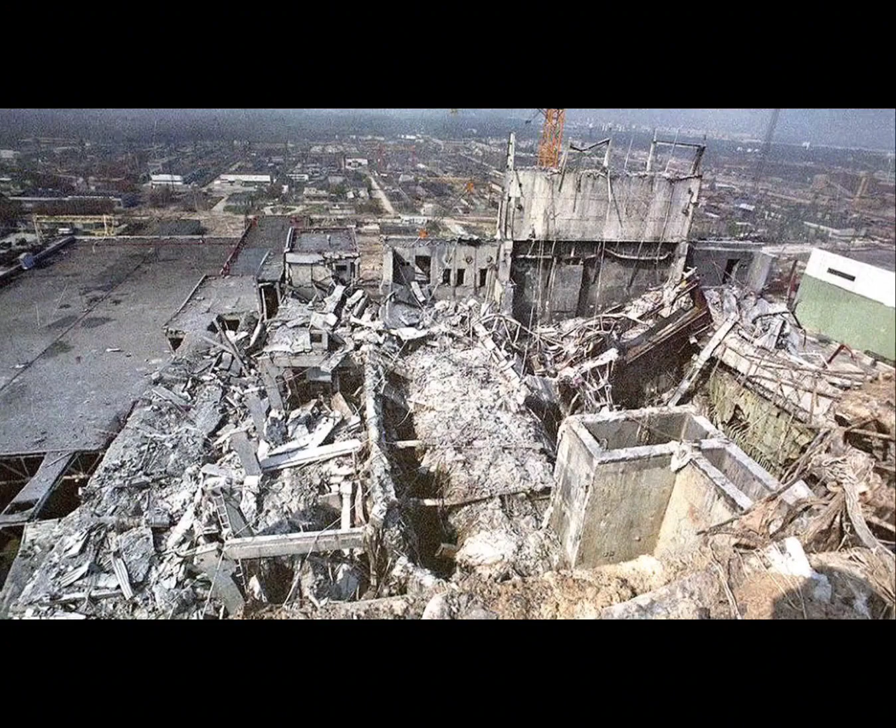According to plan, the test should have been finished during the day shift, and the night shift would only have had to maintain decay heat cooling systems in an otherwise shut down plant. The night shift had very limited time to prepare for and carry out the experiment.

Anatoly Dyatlov, Deputy Chief Engineer of the Chernobyl Nuclear Power Plant (CHNPP), was present to supervise and direct the test. He was one of the test's chief authors and the highest-ranking individual present. Unit Shift Supervisor Alexander Akimov was in charge of the Unit 4 night shift. Leonid Toptunov was the Senior Reactor Control Engineer responsible for the reactor's operational regimen, including the movement of the control rods. 25-year-old Toptunov had worked independently as a senior engineer for approximately 3 months.

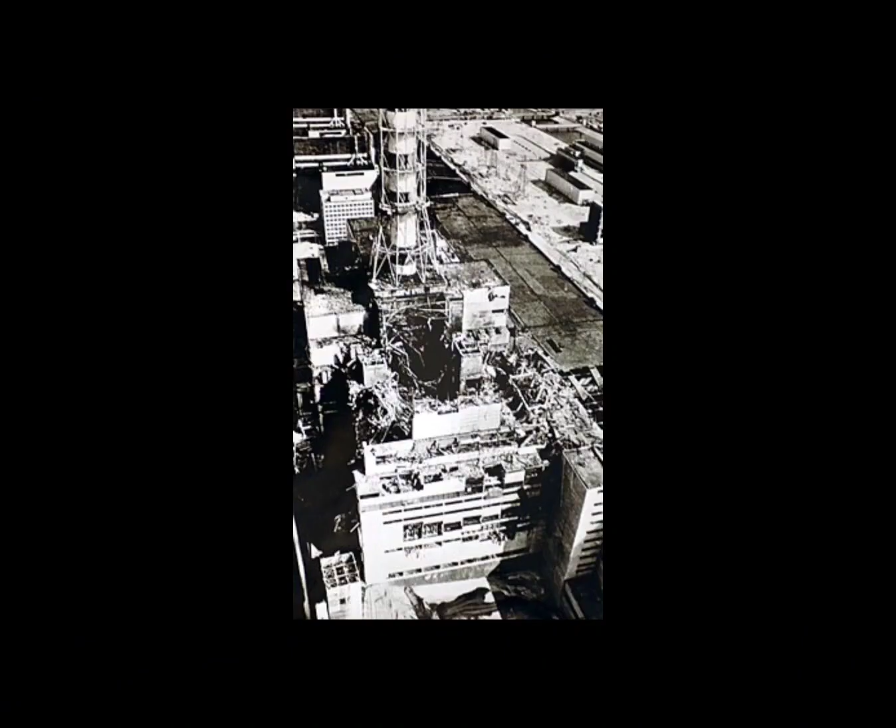The test plan called for a gradual decrease in reactor power to a thermal level of 700 to 1000 megawatts, and an output of 720 megawatts was reached at 0:05 on the 26th of April. However, due to the reactor's production of a fission byproduct, xenon-135, which is a reaction-inhibiting neutron absorber, power continued to decrease in the absence of further operator action, a process known as reactor poisoning.

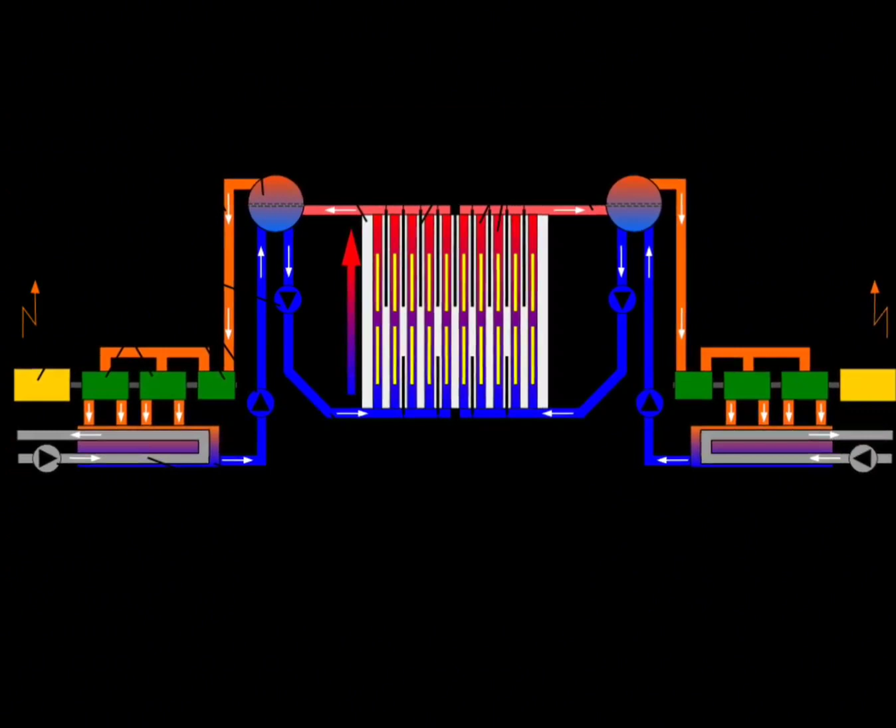In steady-state operation, this is avoided because xenon-135 is burned off as quickly as it is created from decaying iodine-135, by the absorption of neutrons from the ongoing chain reaction, becoming highly stable xenon-136. With the reactor power reduced, high quantities of previously produced iodine-135 were decaying into the neutron-absorbing xenon-135 faster than the reduced neutron flux could burn it off.

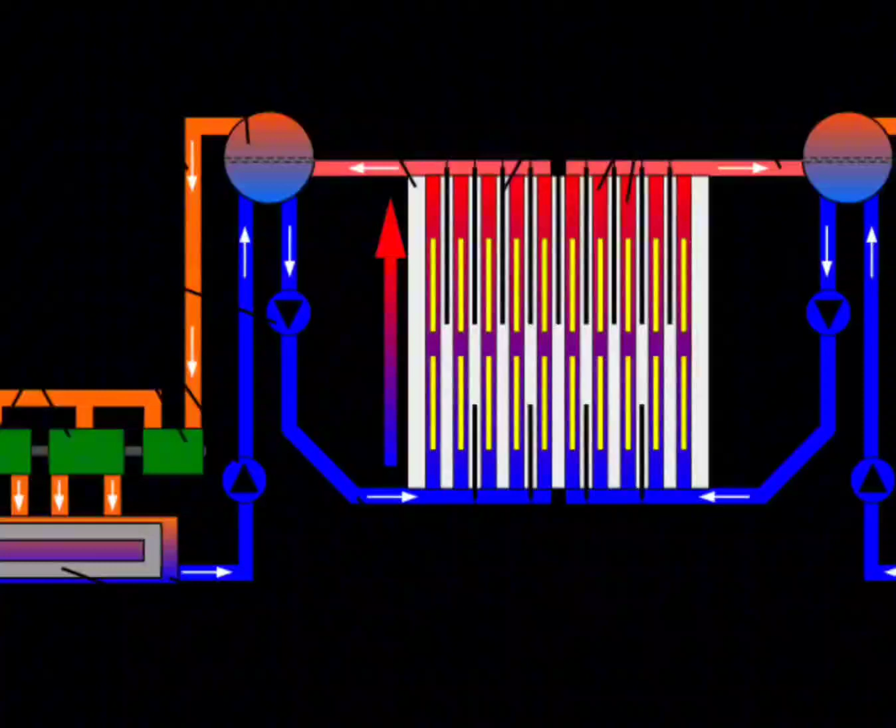Xenon poisoning in this context made reactor control more difficult, but was a predictable and well-understood phenomenon during such a power reduction. When the reactor power had decreased to approximately 500 megawatts, the reactor power control was switched from LAR, local automatic regulator, to the automatic regulators, in order to manually maintain the required power level.

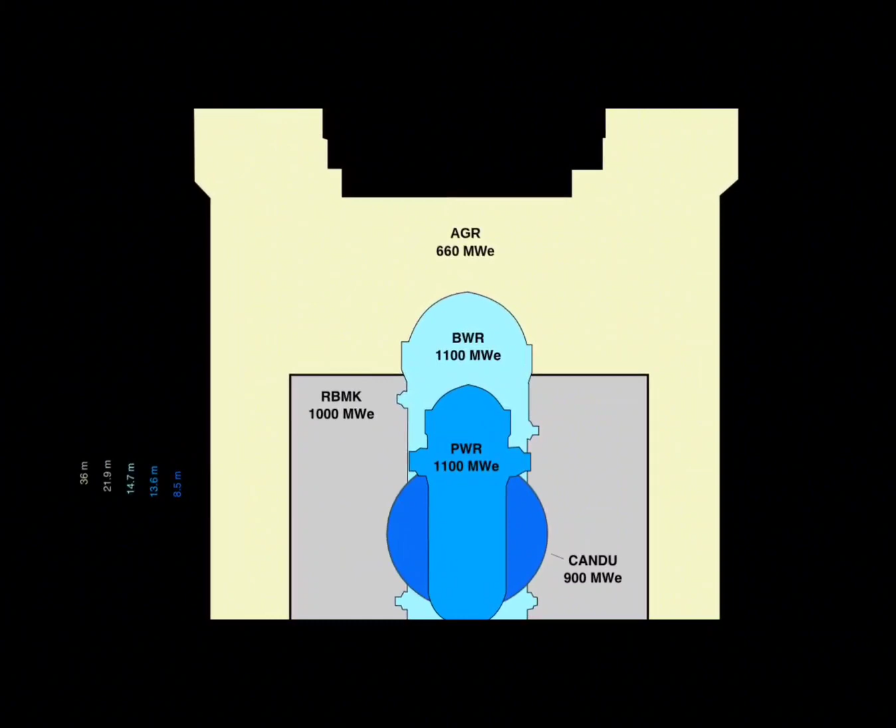AR1 then activated, removing all 4 of its control rods automatically, but AR2 failed to activate due to an imbalance in its ionization chambers. In response, Toptunov reduced power to stabilize the automatic regulator's ionization sensors.

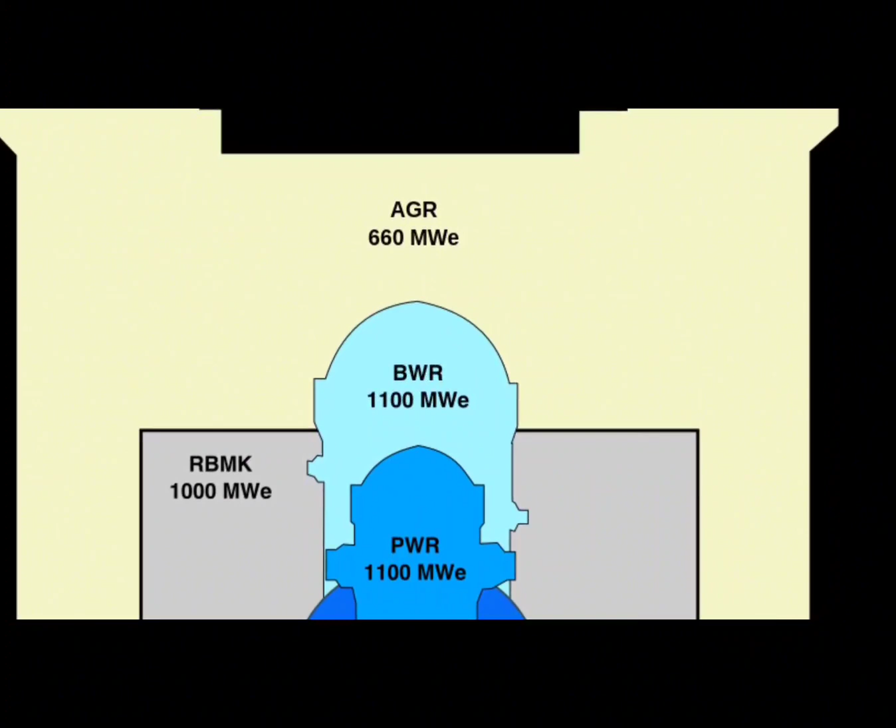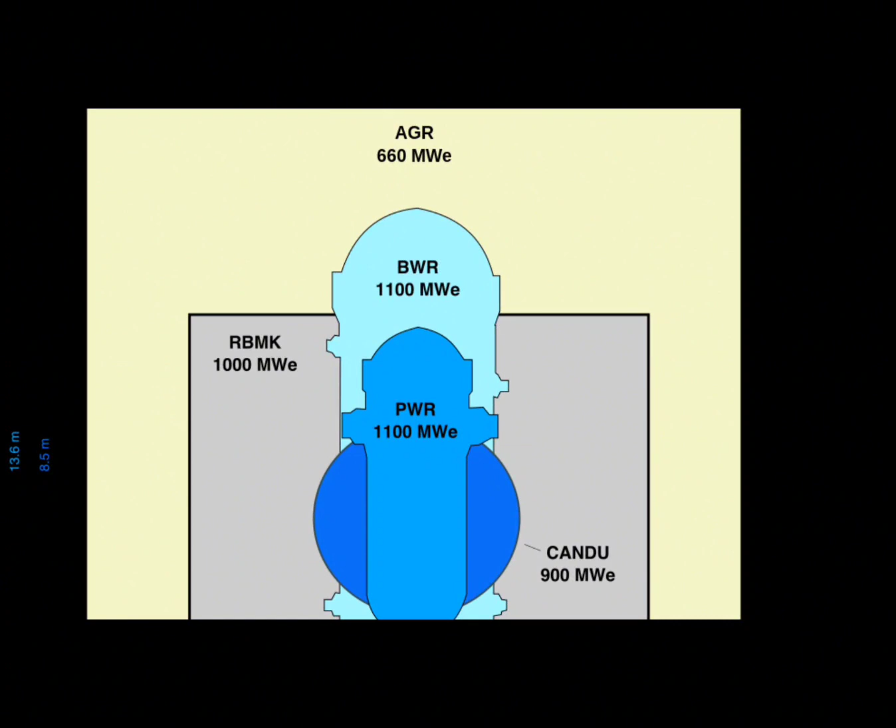The result was a sudden power drop to an unintended near-shutdown state, with a power output of 30 megawatts thermal or less. The exact circumstances that caused the power drop are unknown. Most reports attribute the power drop to Toptunov's error, but Dyatlov reported that it was due to a fault in the AR2 system. The reactor was now producing only 5% of the minimum initial power level prescribed for the test.

This low reactivity inhibited the burn-off of xenon-135 within the reactor core and hindered the rise of reactor power. To increase power, control room personnel removed numerous control rods from the reactor. Several minutes elapsed before the reactor was restored to 160 megawatts at 0:39, at which point most control rods were at their upper limits, but the rod configuration was still within its normal operating limit, with operational reactivity margin, ORM, equivalent to having more than 15 rods inserted.

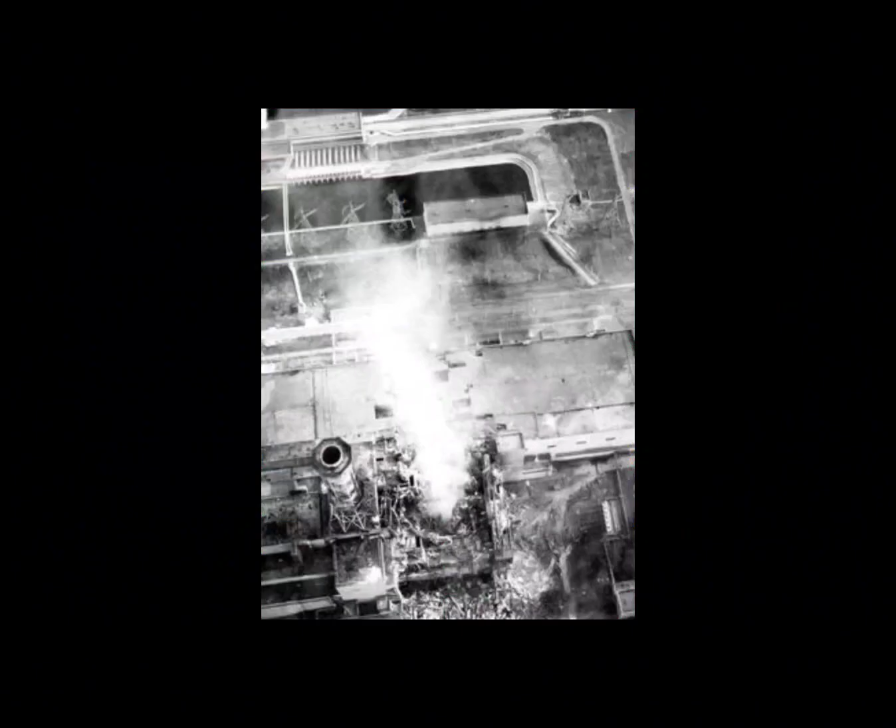Over the next 20 minutes, reactor power would be increased further to 200 megawatts. The operation of the reactor at the low power level and high poisoning level was accompanied by unstable core temperatures and coolant flow, and possibly by instability of neutron flux.

The control room received repeated emergency signals regarding the low levels in one half of the steam-water separator drums, with accompanying drum separator pressure warnings.

In response, personnel triggered several rapid influxes of feedwater. Relief valves opened to relieve excess steam into a turbine condenser.

When a power level of 200 megawatts was reattained, preparation for the experiment continued, although the power level was much lower than the prescribed 700 megawatts.

As part of the test program, 2 additional main circulating coolant pumps were activated at 1:05. The increased coolant flow lowered the overall core temperature and reduced the existing steam voids in the core.

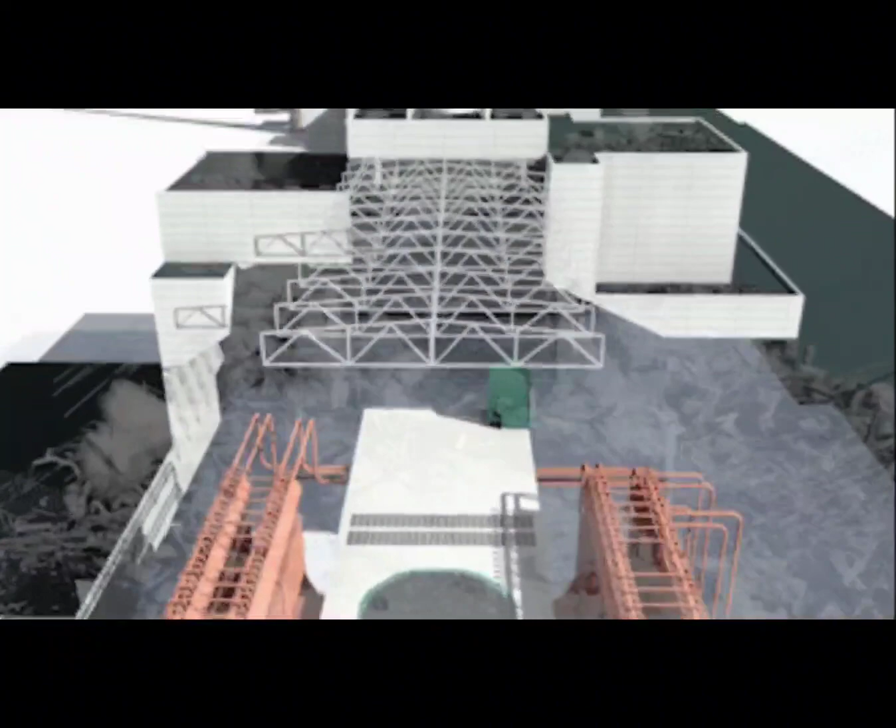Because water absorbs neutrons better than steam, the neutron flux and reactivity decreased. The operators responded by removing more manual control rods to maintain power.

It was around this time that the number of control rods inserted in the reactor fell below the required value of 15. This was not apparent to the operators, because the RBMK did not have any instruments capable of calculating the inserted rod worth in real time.

The combined effect of these various actions was an extremely unstable reactor configuration. Nearly all of the 211 control rods had been extracted, and excessively high coolant flow rates meant that the water had less time to cool between trips through the core, therefore entering the reactor very close to the boiling point.

Unlike other light water reactor designs, the RBMK design at that time had a positive void coefficient of reactivity at typical fuel burnup levels. This meant that the formation of steam bubbles, voids, from boiling cooling water intensified the nuclear chain reaction owing to voids having lower neutron absorption than water.

Unknown to the operators, the void coefficient was not counterbalanced by other reactivity effects in the given operating regime, meaning that any increase in boiling would produce more steam voids which further intensified the chain reaction, leading to a positive feedback loop. Given this characteristic, reactor number 4 was now at risk of a runaway increase in its core power.

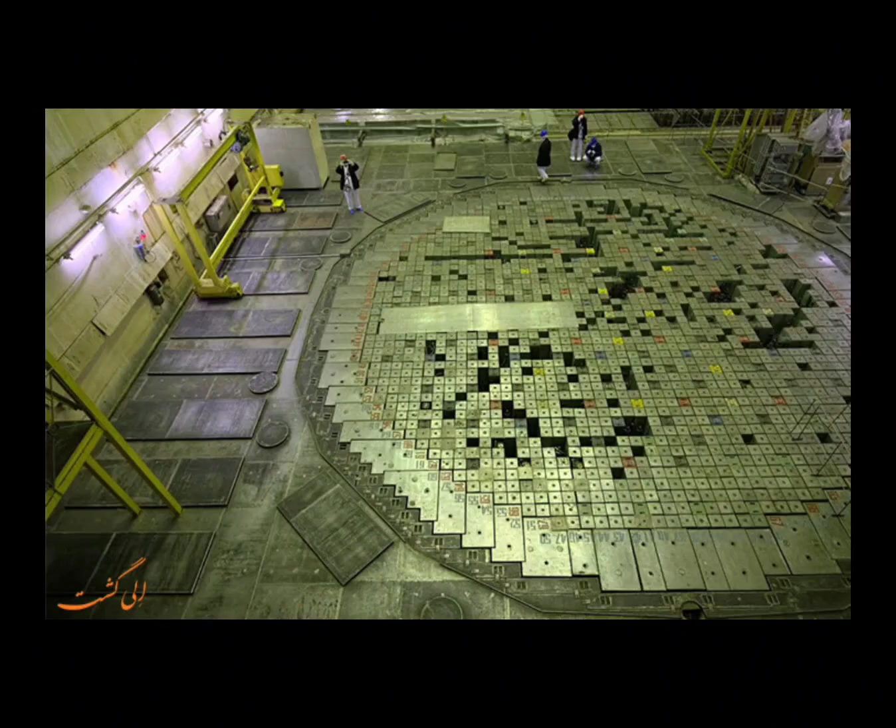with nothing to restrain it. The reactor was now very sensitive to the regenerative effect of steam voids on reactor power.

At 1 hour 23 minutes and 4 seconds, the test began. 4 of the 8 main circulating pumps, MCP, were to be powered by voltage from the coasting turbine, while the remaining 4 pumps received electrical power from the grid as normal.

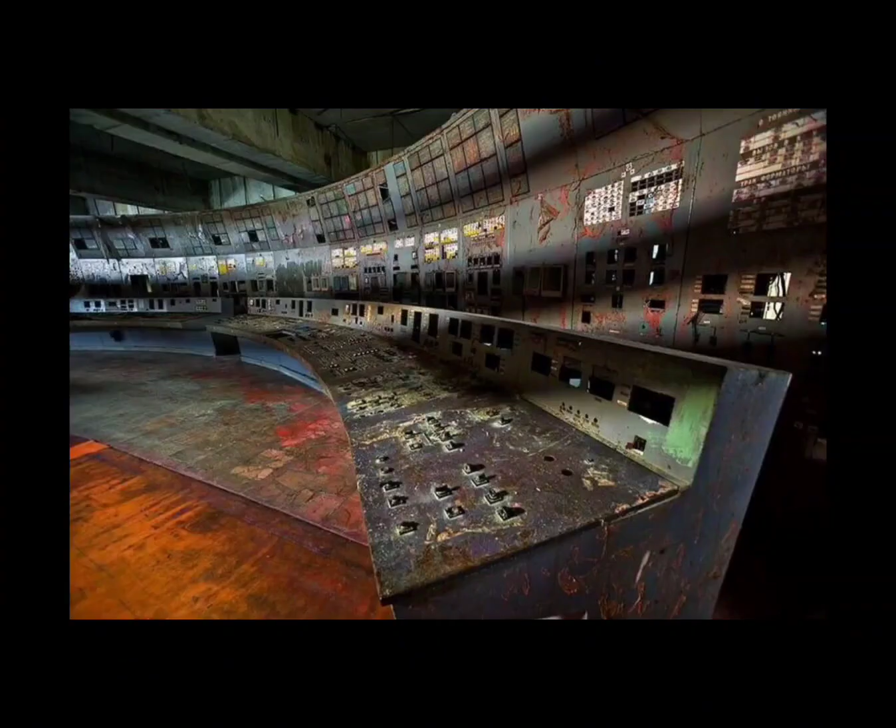The steam to the turbines was shut off, beginning a rundown of the turbine generator. The diesel generators started and sequentially picked up loads. The generators were to have completely picked up the MCP's power needs by 1 hour 23 minutes and 43 seconds.

As the momentum of the turbine generator decreased, so did the power it produced for the pumps. The water flow rate decreased, leading to increased formation of steam voids in the coolant flowing up through the fuel pressure tubes. At 1 hour 23 minutes and 40 seconds, as recorded by the SKALA centralized control system, a SCRAM, emergency shutdown, of the reactor was initiated as the experiment was wrapping up.

The SCRAM was started when the AZ-5 button, also known as the EPS 5 button, of the reactor emergency protection system was pressed. This engaged the drive mechanism on all control rods to fully insert them, including the manual control rods that had been withdrawn earlier.

The personnel had already intended to shut down using the AZ-5 button in preparation for scheduled maintenance, and the SCRAM preceded the sharp increase in power.

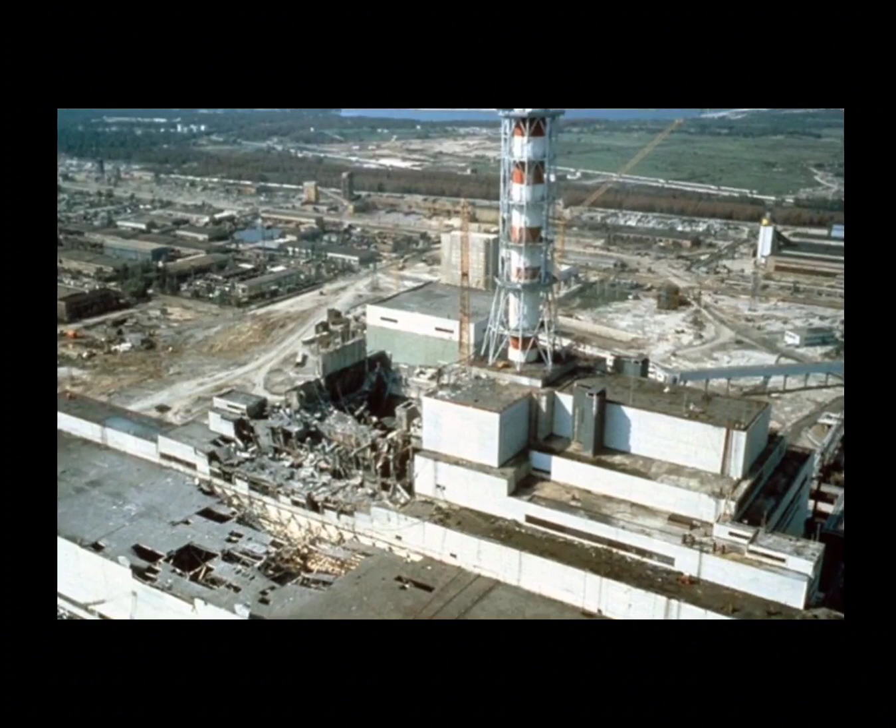However, the precise reason why the button was pressed when it was is not certain, as only the deceased Akimov and Toptunov partook in that decision, though the atmosphere in the control room was calm at that moment.

According to several eyewitnesses, meanwhile, the RBMK designers claim that the button had to have been pressed only after the reactor already began to self-destruct.

When the AZ-5 button was pressed, the insertion of control rods into the reactor core began. The control rod insertion mechanism moved the rods at 0.4 meters per second, 1.3 feet per second, so that the rods took 18 to 20 seconds to travel the full height of the core, about 7 meters, 23 feet.

A bigger problem was the design of the RBMK control rods, each of which had a graphite neutron moderator section attached to its end to boost reactor output by displacing water when the control rod section had been fully withdrawn from the reactor.

That is, when a control rod was at maximum extraction, a neutron moderating graphite extension was centered in the core with 1.25 meters, 4.1 feet, columns of water above and below it.

Consequently, injecting a control rod downward into the reactor in a SCRAM initially displaced neutron-absorbing water in the lower portion of the reactor with neutron-moderating graphite. Thus, an emergency SCRAM could initially increase the reaction rate in the lower part of the core.

This behavior was discovered when the initial insertion of control rods in another RBMK reactor at Ignalina nuclear power plant in 1983 induced a power spike. Procedural countermeasures were not implemented in response to Ignalina, the IAEA investigative report INSAG-7 later stated. Apparently, there was a widespread view that the conditions under which the positive SCRAM effect would be important would never occur. However, they did appear in almost every detail in the course of the actions leading to the Chernobyl accident.

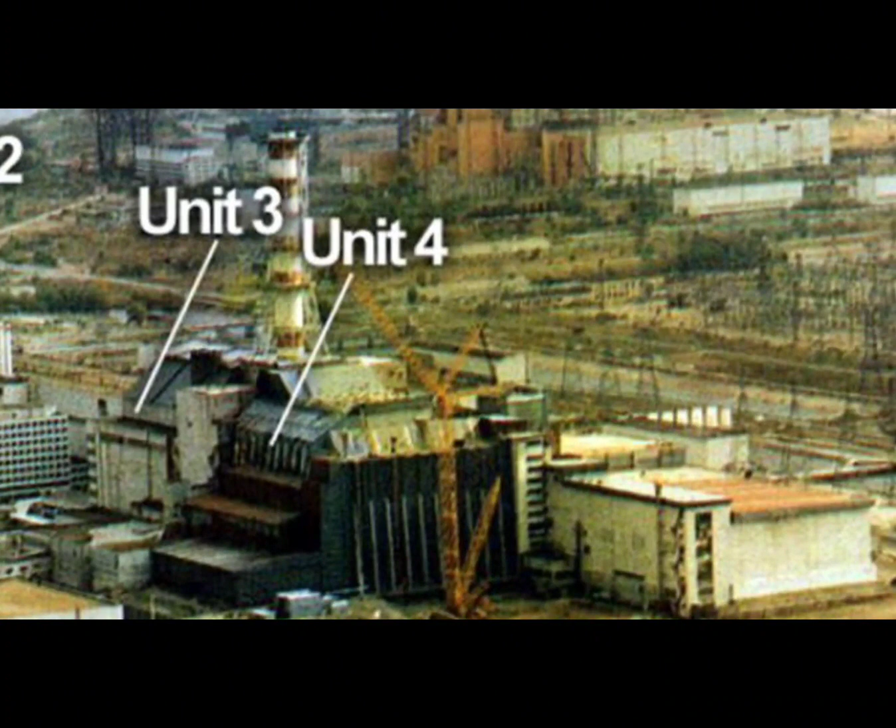According to observers outside Unit 4, burning lumps of material and sparks shot into the air above the reactor. Some of them fell onto the roof of the machine hall and started a fire. About 25% of the red-hot graphite blocks and overheated material from the fuel channels was ejected. Parts of the graphite blocks and fuel channels landed outside the reactor building.

As a result of the damage to the building, an airflow through the core was established by the core's high temperature. The air ignited the hot graphite and started a graphite fire.

After the larger explosion, several employees at the power station went outside to get a clearer view of the extent of the damage. One such survivor, Alexander Yuvchenko, said that once he stepped out and looked up towards the reactor hall, he saw a very beautiful, laser-like beam of blue light caused by the ionized air glow that appeared to be flooding up into infinity.

There were initially several hypotheses about the nature of the second explosion. One view was that it was caused by the combustion of hydrogen, which had been produced either by the overheated steam zirconium reaction or by the reaction of red-hot graphite with steam that produced hydrogen and carbon monoxide.

Another hypothesis, by Konstantin Checherov, published in 1998, was that the second explosion was a thermal explosion of the reactor due to the uncontrollable escape of fast neutrons caused by the complete water loss in the reactor core.